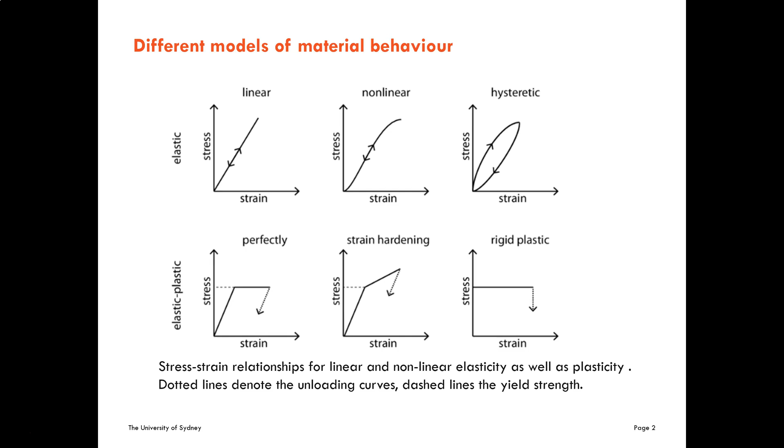So let's start talking about the strength of concrete, a very commonly used material in civil engineering.

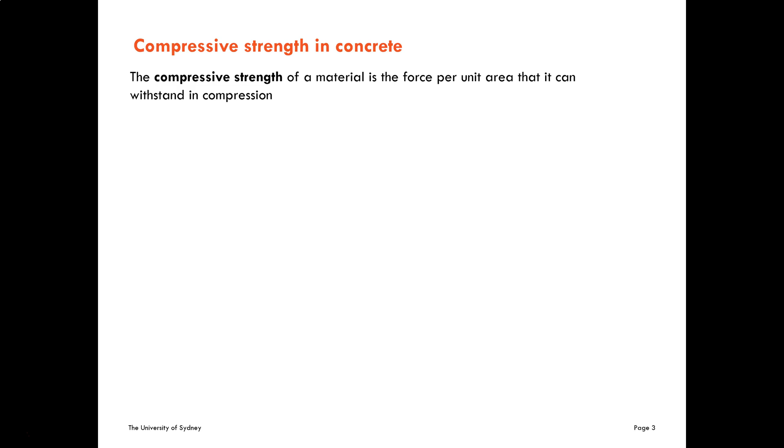The compressive strength of a material like concrete is the force per unit area that it can withstand in compression. Let's consider this experiment.

To measure the strength of the concrete, you do this uniaxial test. You put the concrete specimen here, fix it at the bottom, apply a load, and move this load with a constant, very low velocity, then measure at which point the material breaks.

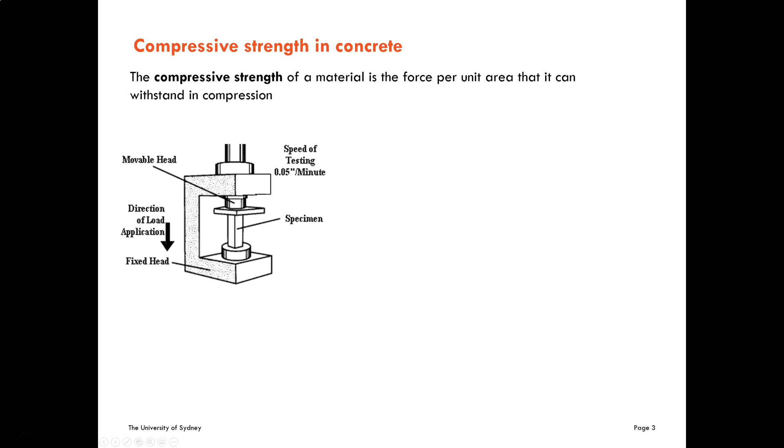This is one example of the test, with the cylindrical specimen, but you can also have a cubic test.

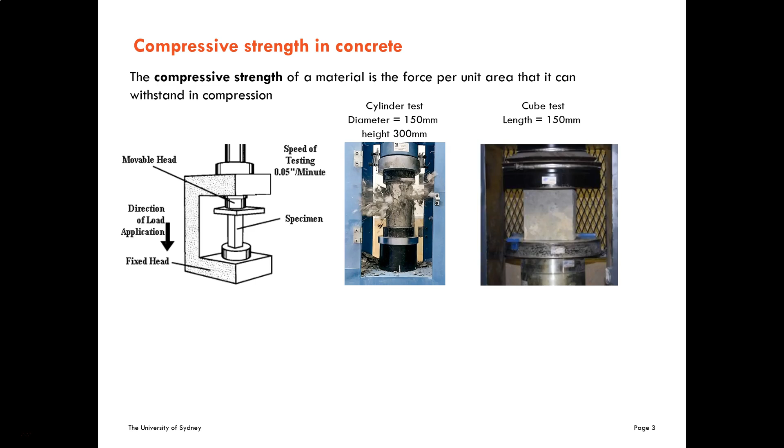This is a typical stress-strain behavior, where you can see the stiffness is reduced, indicating some yielding or plastic deformation. It's going to reach a point when the material cannot sustain any more stress, and this is the failure point. In this case, for compression, it corresponds to the compressive strength of the concrete.

So how do we get this compressive strength? In the cylindrical test, it is assumed to be 90% of the maximal strength in this test, and in the cubic test, it is assumed to be 72% of the strength.

The tensile strength is the strength of the concrete when it is subject to tension. This is an empirical formula that gives us the tensile strength in terms of the compressive strength.

There is another important aspect of concrete behavior that is very relevant: creep. If you put a certain load on concrete, the strain is not going to be constant over time, but there's going to be a small change of strain over time during the years. This change of strain corresponds to concrete creep.

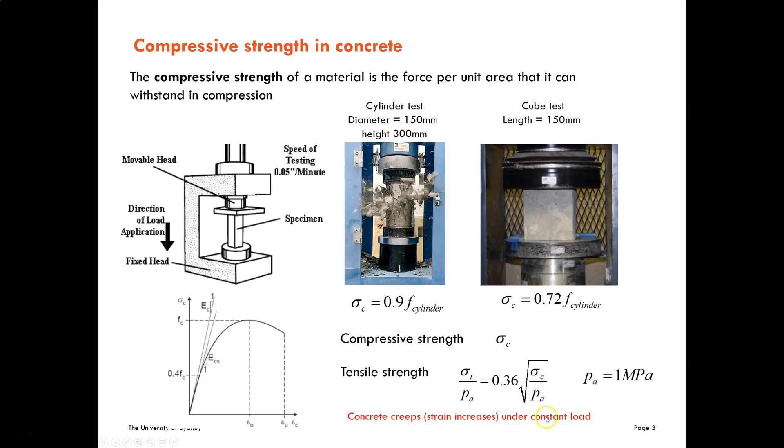It happens in concrete and also in timber. The strain will increase under constant load in a very small fashion. To see a significant change of strain, you have to wait many years. This is creep.

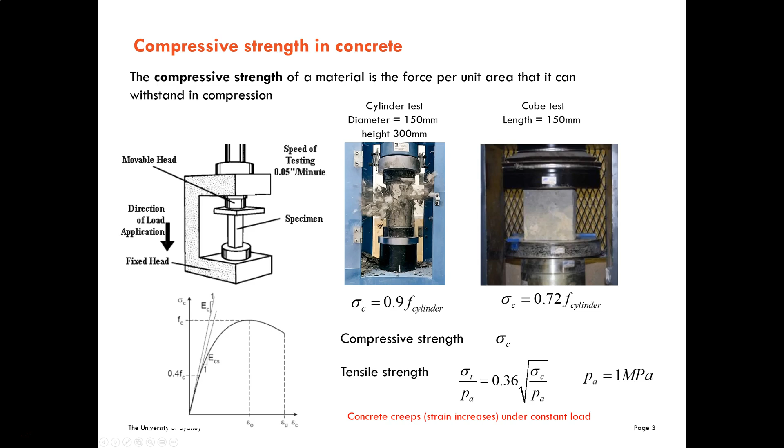Steel is another important construction material, and the tensile strength is the stress that the steel can withstand under tension.

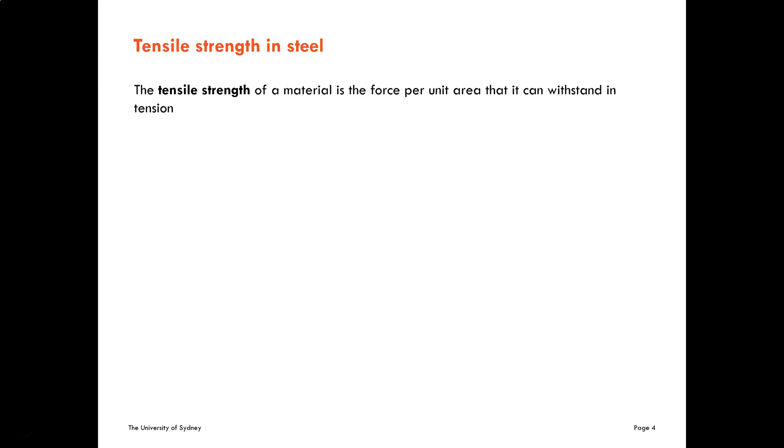To measure the tensile strength, you use this apparatus. This is the specimen, and you move these two parts apart with a constant velocity, and you measure the force.

The typical stress-strain behavior is like this. You have an almost perfect line where the material, the steel, is linear elastic, and there is a point when the material becomes plastic, that is the yield strength.

Then it's going to reach a point where the material cannot sustain any more stress, that is the ultimate strength. This is point D.

But if you control the system by strain, there is another point when the material cannot sustain any more strain, that is the fracture. And also you have an area.

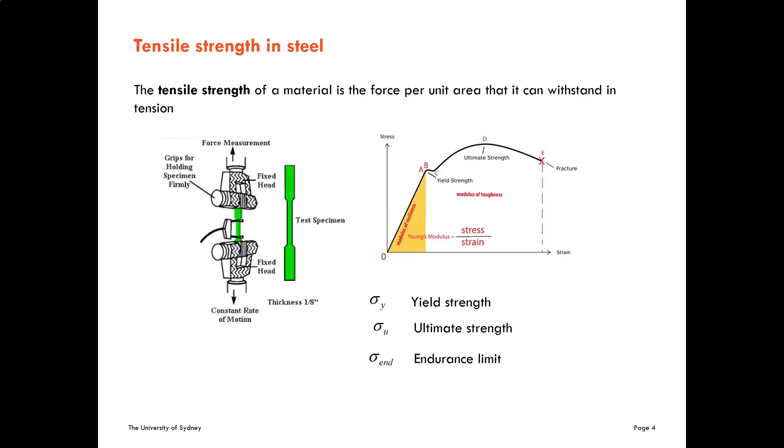What is the endurance limit? It is approximately 50% of the ultimate strength, and is a limit below which the steel is not going to have fatigue. So if you apply cyclic load, repetitive load, in the steel, the material may break, but if this load has an amplitude that is lower than 50% of the ultimate strength, it probably is not going to yield by fatigue.

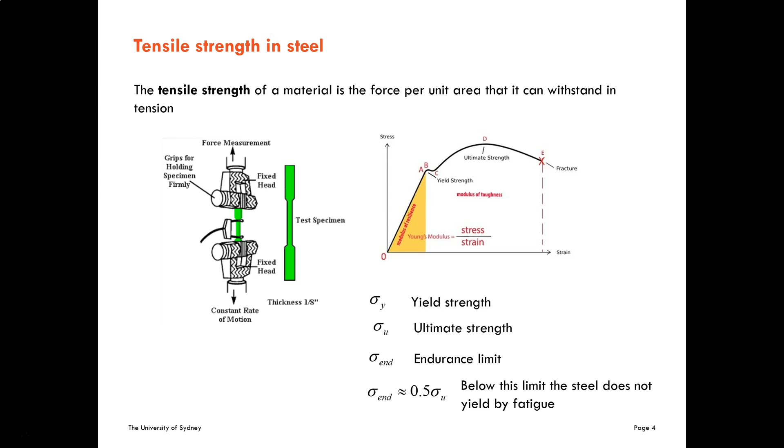So the next material is granular media, like soils, clays, or any material consisting of granulates. In this kind of material, the failure happens in shear deformations, and we define the shear strength as the maximal shear stress after which the material will fail by shear.

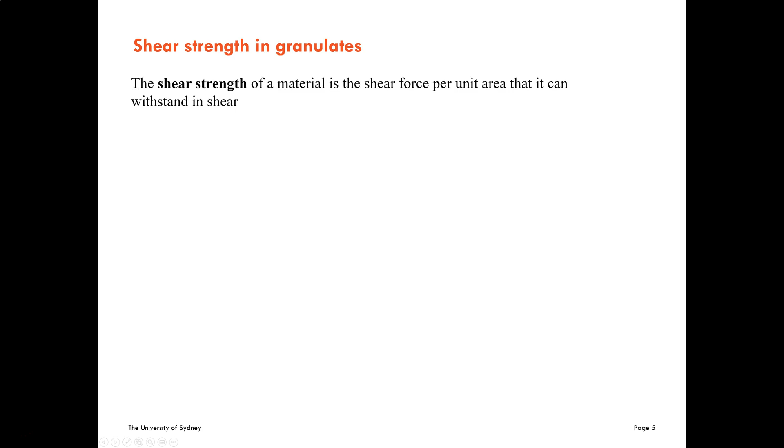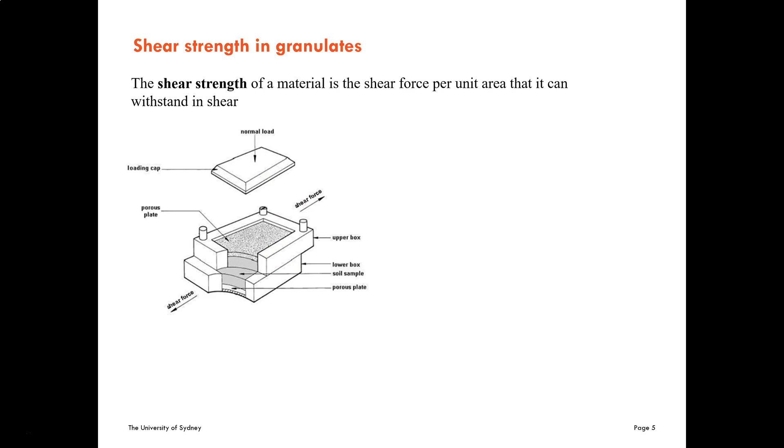To measure the shear strength, we use this shear box. We put the granular media here, and it has two parts: one is fixed, another moves. We apply a normal force here, and we move the upper part with a constant velocity, and the typical stress-strain relation is this one, where this is the shear stress, and this is the displacement of the top part.

We observe here elastoplastic behavior until one point, that is the peak strength. After this point, the soil is going to soften, and it will reach a limit behavior where we have a residual shear strength that is called tau R. So these are the two quantities that characterize the strength of a granular material.

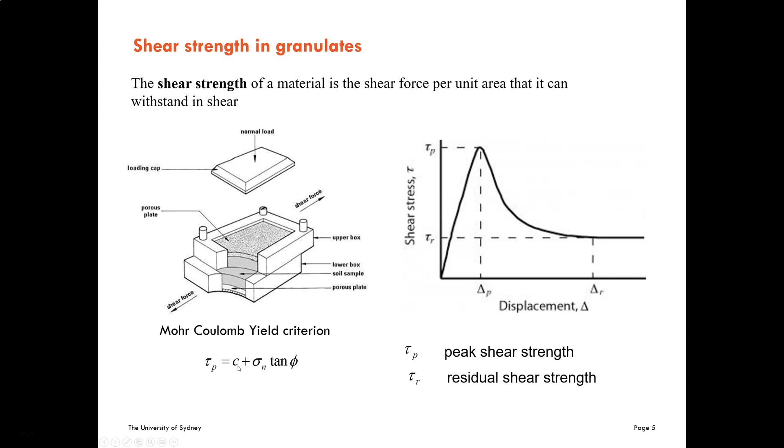The experimental behavior of this strength is represented by the Mohr-Coulomb yield criterion. So the peak shear strength is related to the normal load that I apply in the shear box, and there are two strength parameters: the cohesion of the soil and the angle of friction of the soil.

So it is important to understand that this yielding or failure doesn't happen globally in a structure, but happens in a particular point. It's going to start in a point and propagate probably from this point. So we need to check if the material is yielding or failing by monitoring the stress in each point of the structure, but you don't need to monitor all the components of the stress, only the invariants.

So what is invariants? The stress tensor is a symmetric tensor with 6 independent components that can be represented like this or like this. This tensor is symmetric, and since it is symmetric, you can find a local coordinate system at each point where this tensor is going to be represented like this, so in this coordinate system you only have 3 components that are the 3 principal components of the stress tensor.

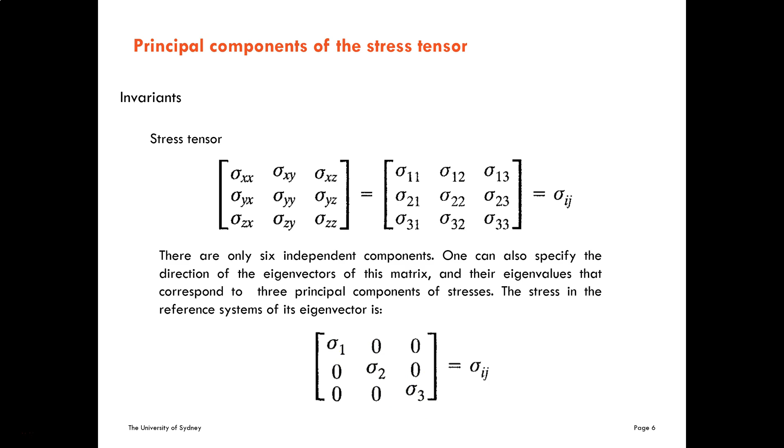Now I can define with these 3 components the stress invariants: the mean stress, also called hydrostatic stress, which is the average of these 3 values; the von Mises stress or deviatoric stress, which is this quantity; and the other one is the Lode angle.

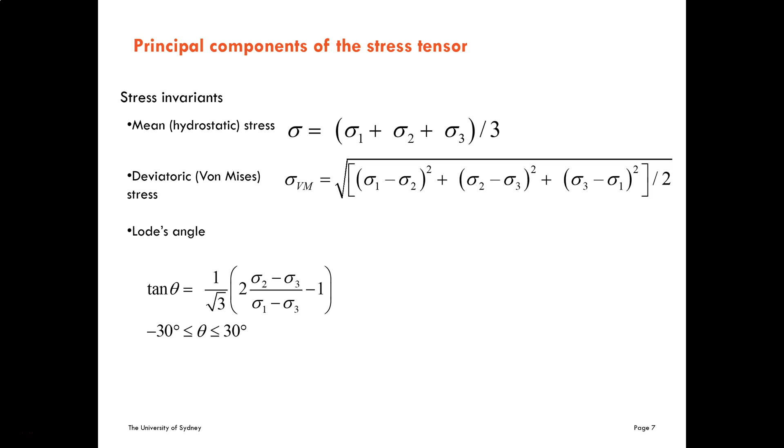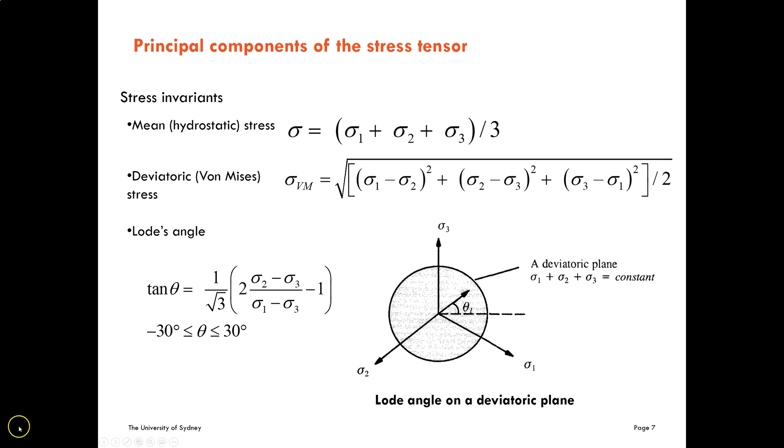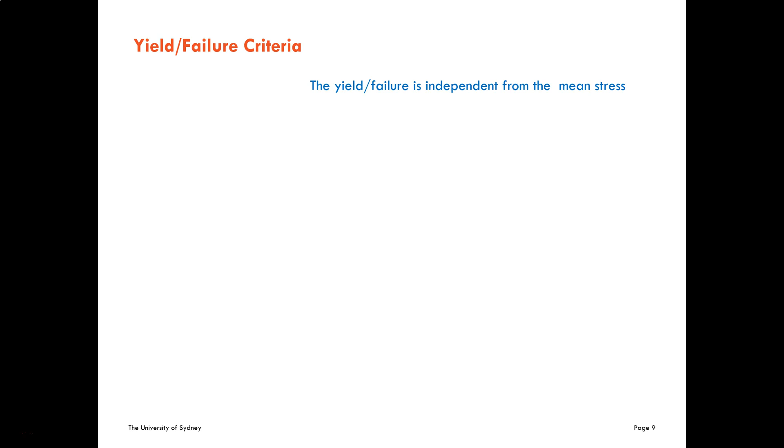In terms of the principal components of the stress, or the invariants, we can define the yield criteria or the failure criteria. The first case is when the yield criteria, the yielding or the failure, doesn't depend on the mean stress.

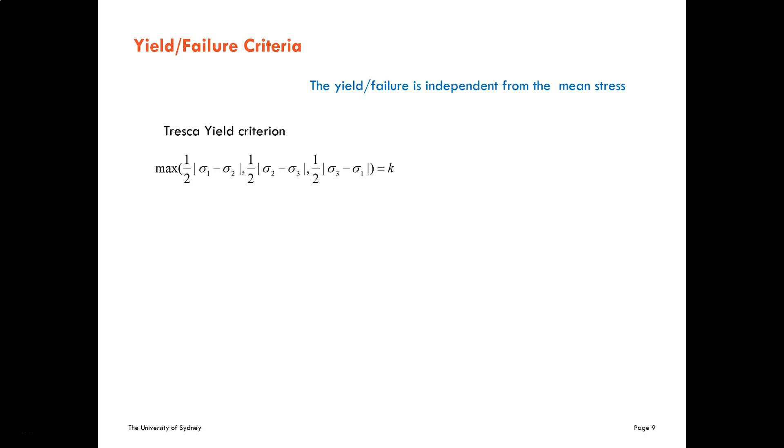One example of these models of failure corresponds to the Tresca yield criterion. So you have this surface: if the stress is inside of this surface, it's elastic; if the stress reaches the surface, it becomes elastoplastic. This is the Tresca yield criterion, and it has a single material parameter that corresponds to the compressive strength.

And it can be improved by the von Mises yield criterion. This can be represented by a smooth surface like this. This is the von Mises yield surface.

So if you project this surface in one plane, this will correspond to the plane stress analysis. So it's easy to visualize here the yield or failure. Von Mises will correspond to the intersection of the surface with the plane, that is an ellipse, with a compressive strength that is going to be the same as the tensile strength, and the Tresca will correspond to a polygon. So you can see that von Mises is a better option because it's a smooth surface.

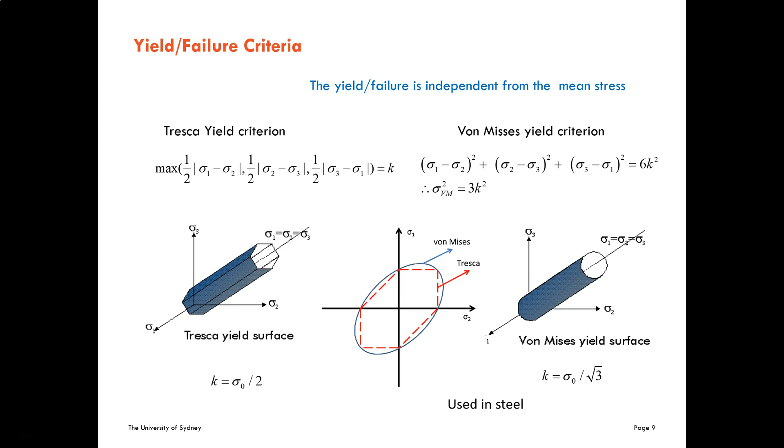So this criteria is used in steel because the yielding point or the failure point of the steel doesn't depend on the mean stress.

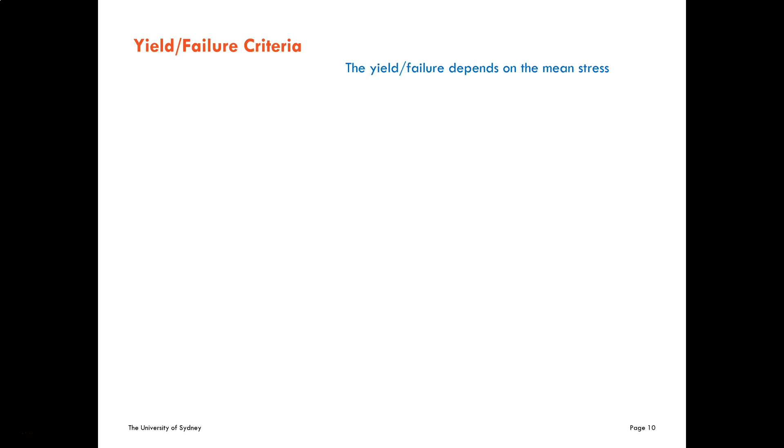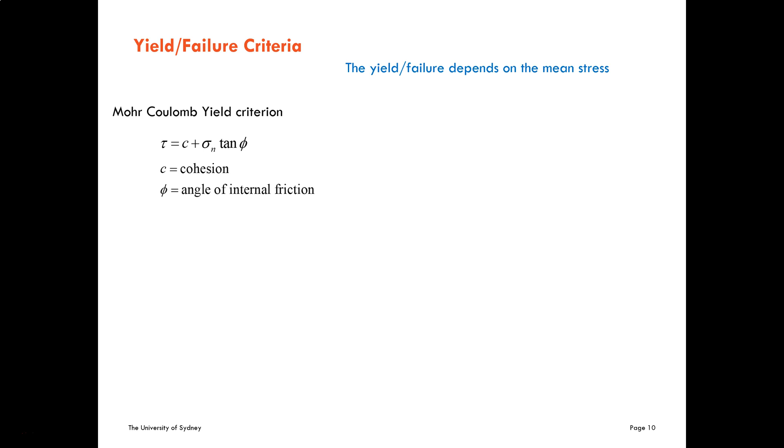There is another model for yielding or failure where the yield or the failure depends on the mean stress. This is the Mohr-Coulomb yield criterion that we already introduced. So if we express this criteria in the stress space, with the two material strength parameters, it's going to correspond to this geometrical structure that is quite complex. This is the Mohr-Coulomb yield surface.

Simplification of this surface is the Drucker-Prager criteria, where this pyramid structure is replaced by a cone. It's going to be better because it's smooth.

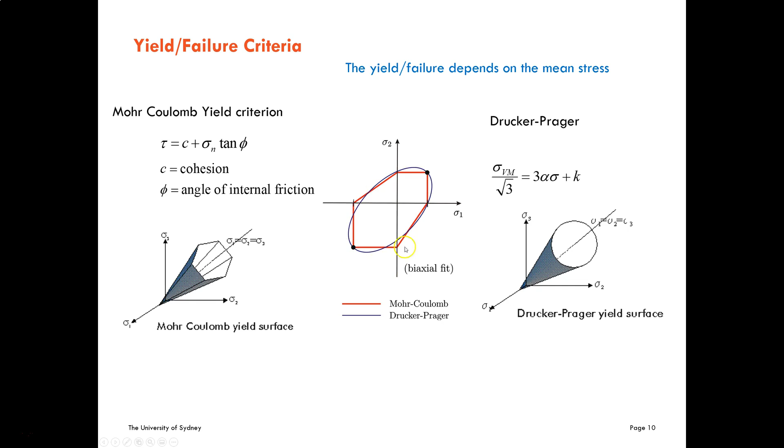So this is the projection of these surfaces in the plane that corresponds to the plane stress analysis. This polygon corresponds to the Mohr-Coulomb. This polygon gives you two different values: one is the compressive strength, another one is the tensile strength. You can approximate this polygon by an ellipse, and then you can convert this Mohr-Coulomb yield surface into a Drucker-Prager yield surface. This one is going to be better because it's a smooth cone, giving you a better description of the yield or the failure.

So this criteria is used mostly in soils because soils satisfy this Mohr-Coulomb yield criterion to a high degree of approximation.

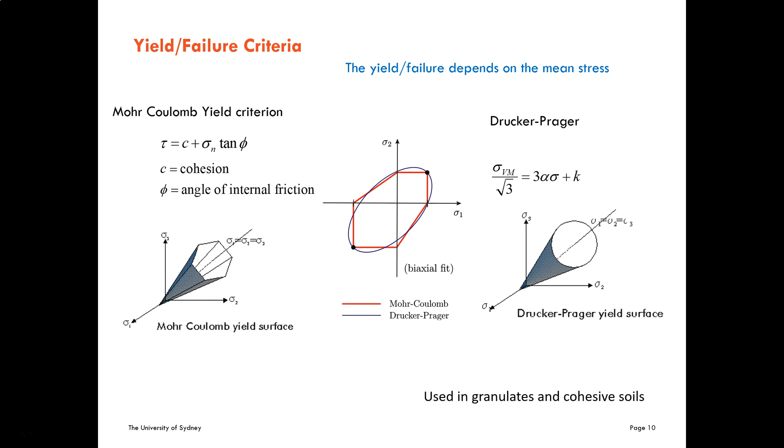So Drucker-Prager criteria is a very robust criteria because you can see here that von Mises is a special case of Drucker-Prager when the angle of this cone is 0.

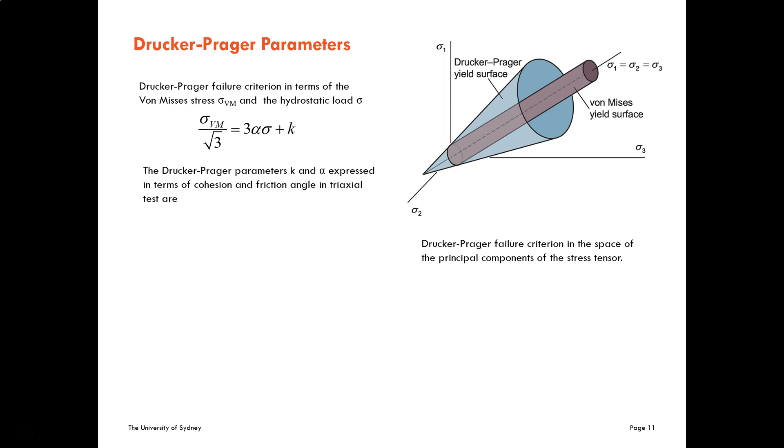Also, there are some important formulas. So this is the equation of the cone. This is the Drucker-Prager criteria, and you can calculate these two parameters. Alpha is related with the aperture of this cone, and K is related with the apex of this cone, this vertex of the cone. So you can calculate these two quantities in terms of the cohesion of the soil and the angle of friction of the soil. This formula is very useful.

But if you want to use the Drucker-Prager criteria for concrete, you have to relate these two parameters with the tensile or compressive strength of the material. So this is the formula. I give you the two parameters of the Drucker-Prager model in terms of the compressive strength of the concrete and the tensile strength of the concrete.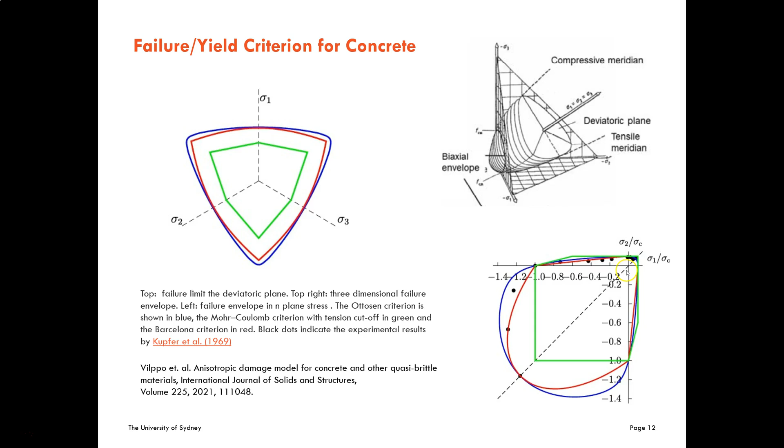So in summary, if you are modeling steel, it is recommendable that you use the von Mises criteria, and if you are working with concrete, it's better that you use the Mohr-Coulomb criteria for conservative predictions of failure.